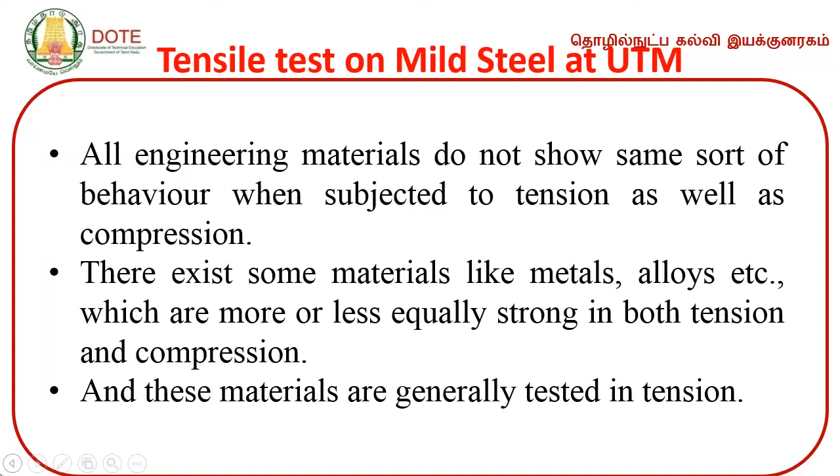These materials are generally tested for tension only, because they exhibit similar properties or similar behaviors when they are subjected to compression also.

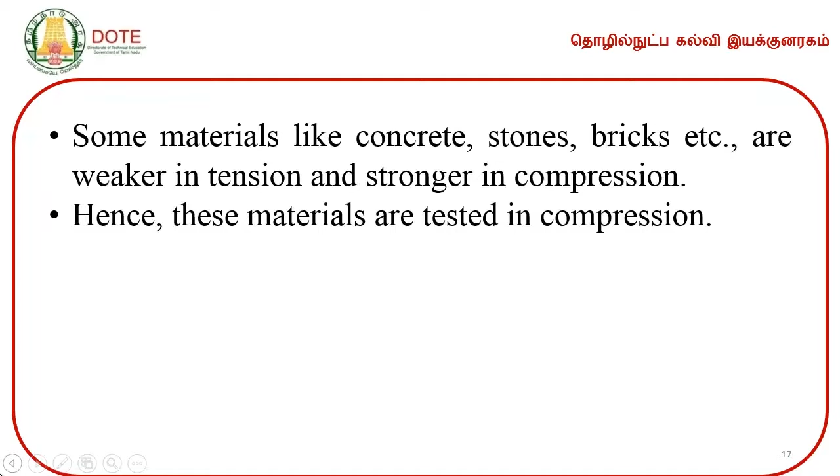Some materials like concrete, stones, and bricks are weaker in tension but stronger in compression.

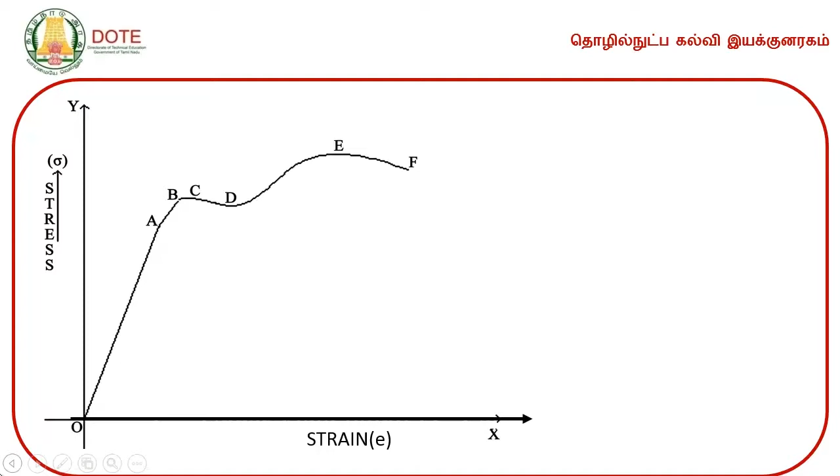It starts from O, from O to A it is like a straight line, then there is a small curve from A to B, then there is a bending from B to C, then once again there is a step down curve from C to D, then from D to E another curve, then E to F. We will see them one by one.

First, what is point A? Point A on the stress strain curve is a point up to which the plot is a straight line.

Here the stress is directly proportional to the strain. So up to point A, stress is directly proportional to strain. Up to this proportional limit, the material remains elastic and strictly follows Hooke's law.

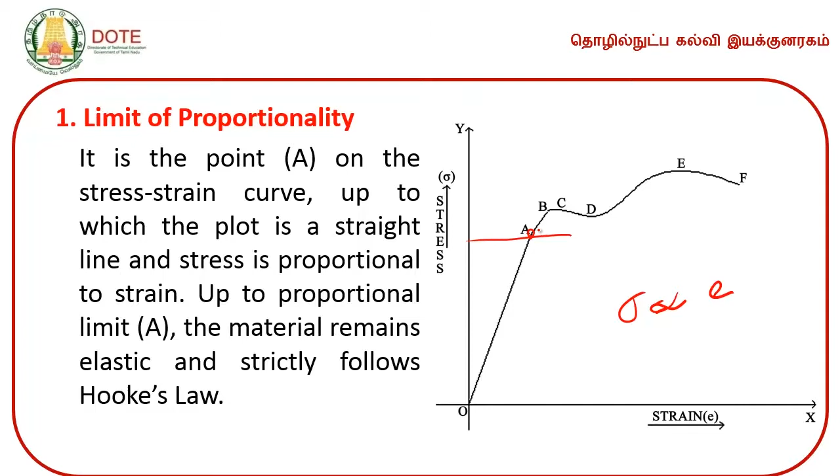It remains elastic. This is the elastic stage up to which the material remains in the elastic stage and obeys Hooke's law. Then point B, what about B?

It is the point just beyond the proportional limit. From the proportional limit to the elastic limit, the material remains elastic but does not follow Hooke's law, and so stress and strain are not proportional.

Up to A, stress is directly proportional to strain and it obeys Hooke's law.

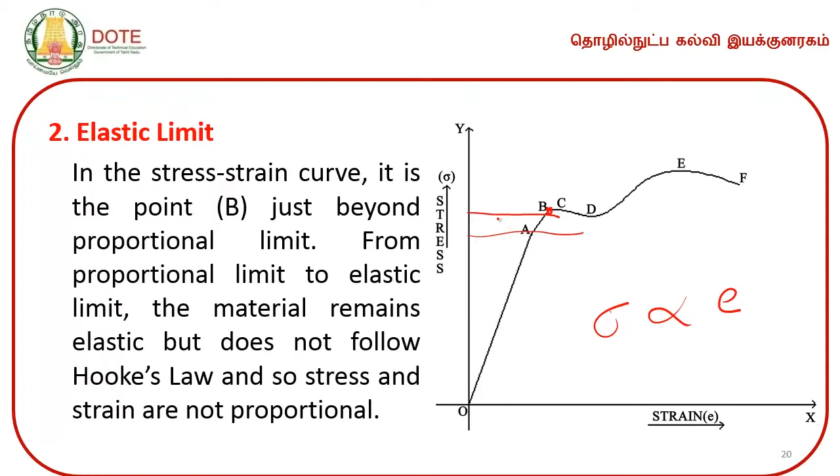But from A to B there is some variation, it is like a curve. In this curve, the material remains elastic up to this point, but it does not follow Hooke's law in this portion.

Then comes point C. Point C represents the upper yield point and point D represents the lower yield point.

The stress at which there is a sudden increase in strain without any appreciable increase in stress is known as yielding. Yielding means the strain value increases without that much increase in the stress value.

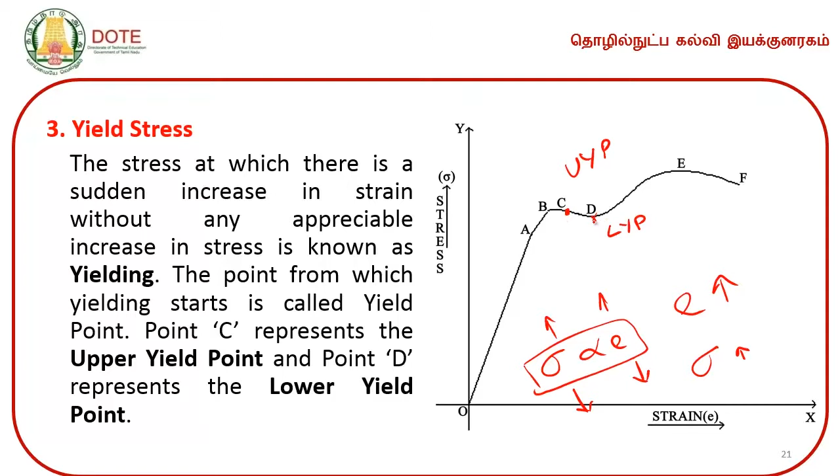In the chart, C represents the upper yield point and D represents the lower yield point. Then comes point E. What is point E? After yielding, the material attains the maximum load at E, beyond which the load falls with elongation increasing at a rapid rate. The stress corresponding to point E is known as ultimate stress.

As the load falls from its maximum value, a sudden yielding of the bar takes place over a short length, forming a neck. So we are having a rod like this. It is a ductile material. The rod is made of ductile material and it is subjected to tension.

At point E, the rod tends to form a neck. At this stage, we have already discussed what tensile force is - in an object, if there are two axial pulls, then the object is said to be under tension. Due to the applied tensile force, the length of the object will increase and the diameter of the object will decrease.

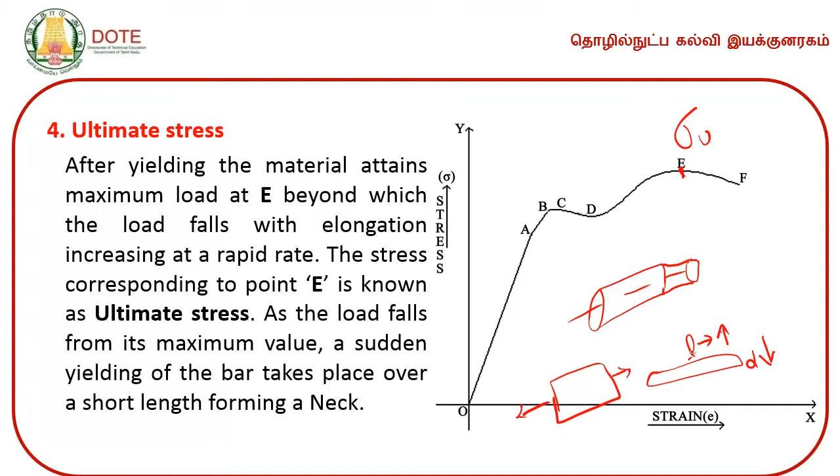Length will increase and the diameter will decrease. So there is a formation of neck in the testing rod. Then what about point F? Point F represents the breaking point.

At this stage, the elongation increases at a rapid rate and the area of cross section of the bar undergoes fast reduction. The specimen breaks at point F. So we are having a specimen - it is nothing but a rod A, B, C, D, E up to E.

It remains as it is, and from E it starts to form a neck. It starts to form a neck, and at point F it fails, and there is a drastic reduction in the diameter of the rod - in the cross section. The specimen breaks at point F.

The stress corresponding to the breaking point is known as breaking stress. The value of breaking stress will be less than the ultimate stress.

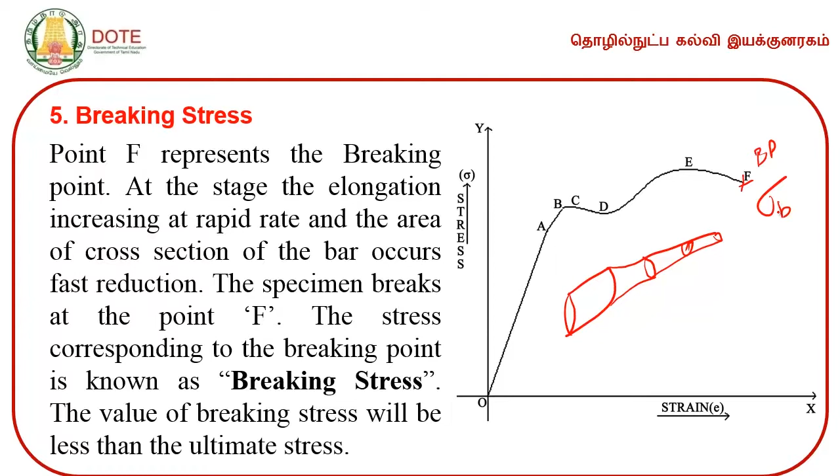Now we can determine the percentage of elongation. Percentage of elongation is given by L0 minus L divided by L. So we are having a rod of length L. This is the original length.

It is subjected to tensile force. Because of the tensile force, after reaching point E, there is a reduction in the cross section of the rod. So there is a change in the rod - an increase in the length of the rod, given by delta L.

So we can determine the original length of the rod after fracture as L0. L0 is going to be the length of the testing specimen or rod after fracture, and L is going to be the original length. From this we can determine the percentage of elongation.

Similarly, the percentage of area reduction can be determined by the formula D square minus d square, divided by D square, into 100. What is capital D? Capital D is the original diameter. Now this diameter is reduced to a smaller value, so small d is the diameter of the rod at the neck.

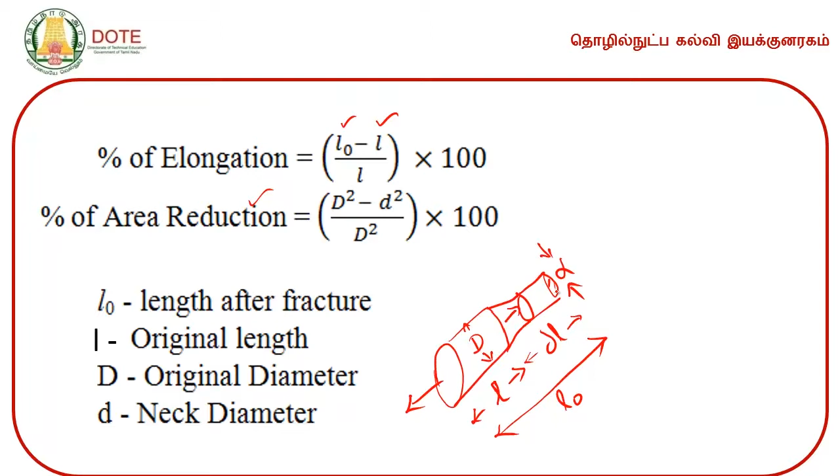So using these values, we can determine the percentage of elongation and the percentage of area reduction of the bar subjected to tensile load. Now we will look at a problem.

A specimen made of steel, having 25 mm diameter with a gauge length of 200 mm, was tested in a laboratory. So, 25 mm diameter steel rod, length is 200 mm, was tested in a laboratory.

The following data were recorded: maximum load is 140 kilonewton, load at yield point is 110 kilonewton, load at fracture is 120 kilonewton, diameter of the neck is 12.5 mm, and distance between the gauge marks after fracture is 252 mm.

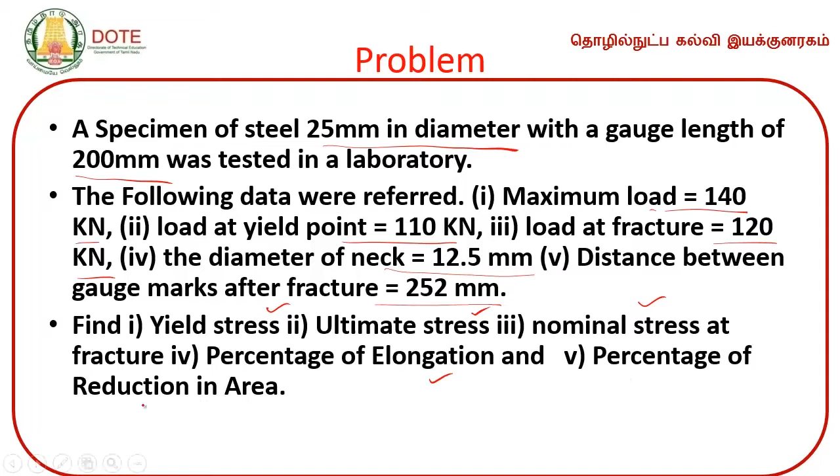Using this value, we have to find yield stress, ultimate stress, nominal stress at fracture, percentage of elongation, and percentage of reduction in area. Now we will go to the problem.

What are the given data? Original diameter D is 25 mm, original length, that is the gauge length, is 200 mm, maximum load is 140 kilonewton - this is 140,000 Newton. Load at yield point Py is given by 110 kilonewton, which can be converted into Newton. Load at fracture is 120 kilonewton, which can also be converted into Newton. Neck diameter is also given as 12.5 mm.

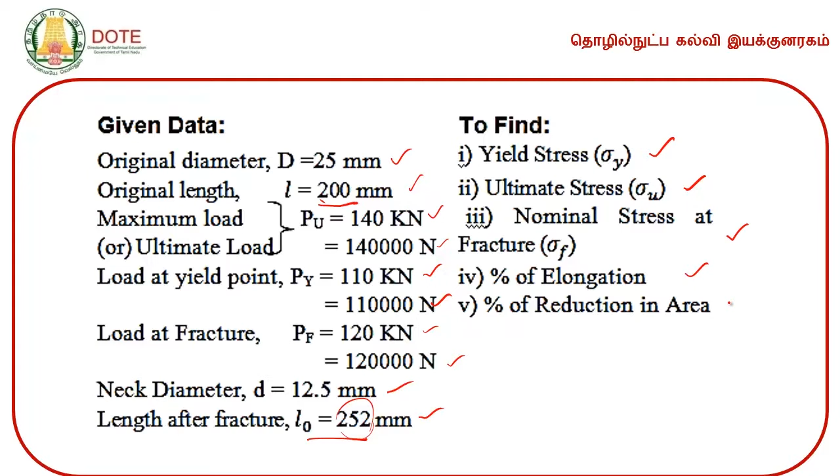Length after fracture is given as 252 mm. Since it is subjected to tension, you can see the original length is 200, now increased to 252 mm. Now we are going to find the value of yield stress, ultimate stress, nominal stress at fracture, percentage of elongation, and percentage of reduction in area. We will see them one by one.

So, what is the original area? Original area A is equal to pi by 4 d square. We know the value of d, the original diameter of the rod. What is capital D? The original diameter of the rod before the testing process. So it is going to be 490.87 mm square.

Then yield stress, what is the formula for yield stress? Yield load divided by area resisting the yield load. It is also given, so we can directly calculate it.

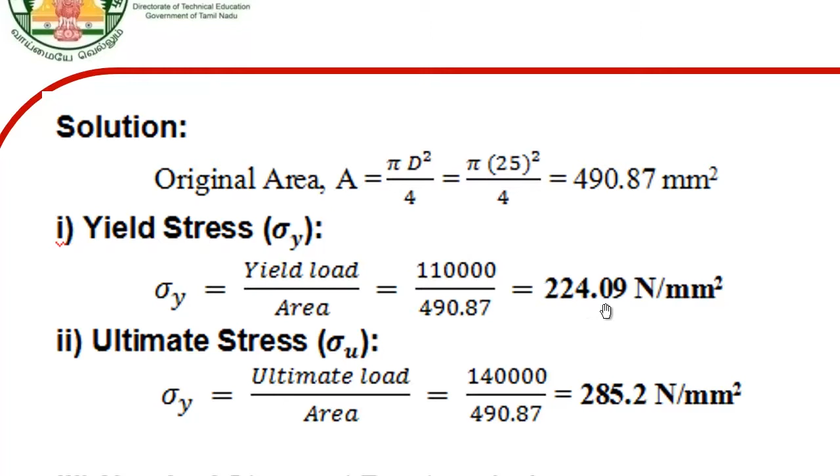224.09 Newton per mm square. Then second step, we go to find the ultimate stress. What is stress? Stress is equal to load by area. Ultimate stress is equal to ultimate load by area. It is also given, so we can calculate the value of ultimate stress.

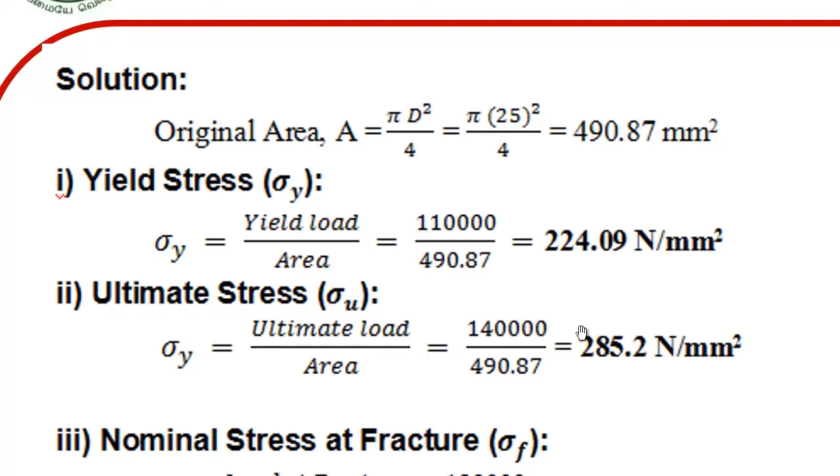Then normal stress, or nominal stress at the fracture, is given by load at the fracture divided by area. So we can substitute the values and find them easily by simple substitution, and using the calculator we can compute the value.

What is the percentage of elongation? Percentage of elongation is given by the formula LO minus L by L, where L is the length of the original object and LO is the length of the object after fracture. So, 252 minus 200 by 200 into 100%, that is going to be 26%.

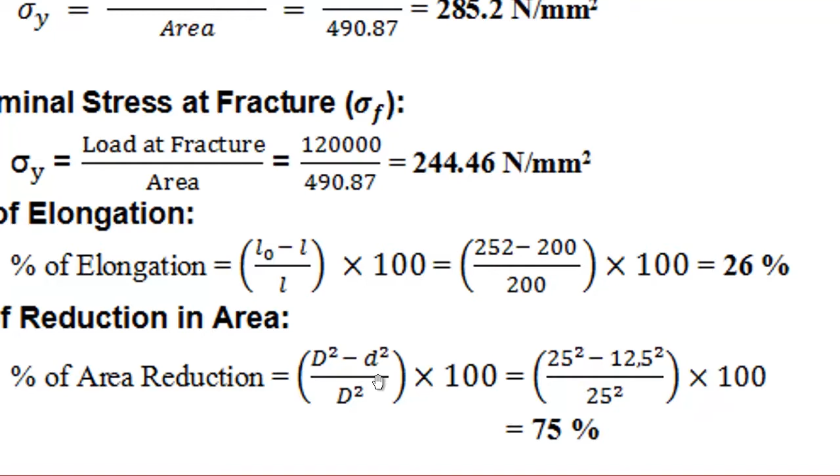Percentage of reduction in area is given by D square minus d square by D square. What is capital D? Original diameter of the rod. What is small d? The diameter of the rod reduced in the neck. The neck diameter is small d. So it is given by 25 square minus 12.5 square divided by 25 square. So it is going to be 75%.

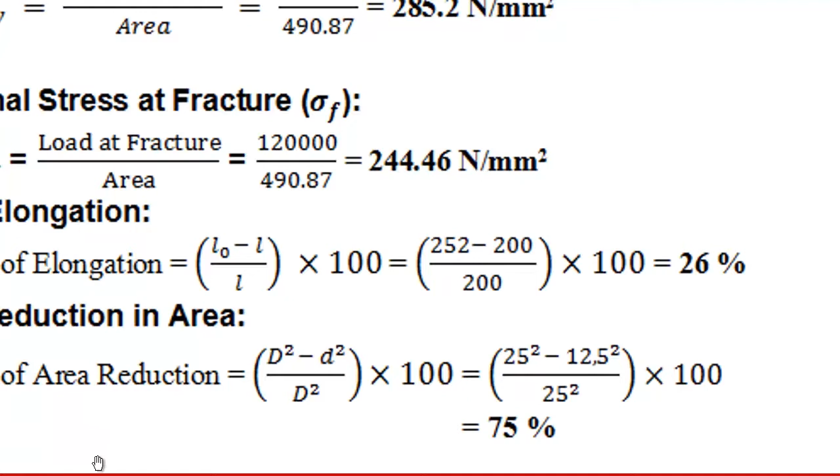Now we can summarize the results. Yield stress, ultimate stress, nominal stress, they are having the units Newton per mm square. Don't forget to put the units. Then percentage of elongation and percentage of reduction in area. Percentage of elongation in length, elongation itself means length, is 26%. Reduction in area is 75%. Is it clear? Okay.

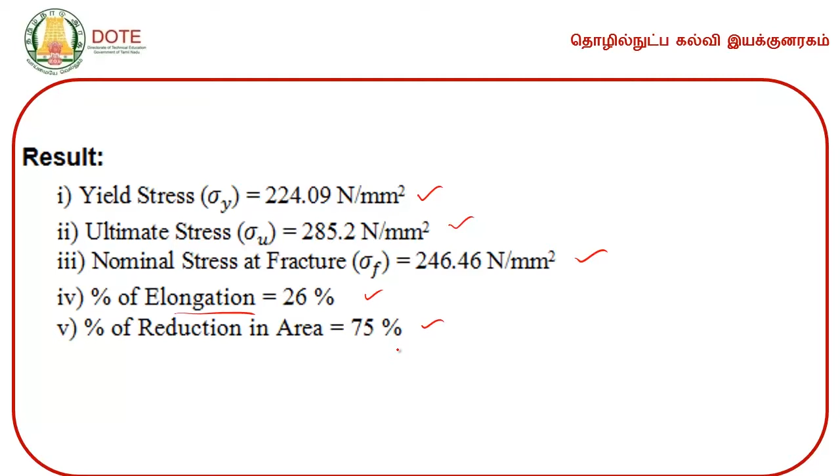Now we are going to find out the formulas used to determine the volumetric strain on rectangular and circular bars. For determining the linear strain, we use the formula change in length to original length. To determine the lateral strain, we can use change in diameter to original diameter, change in width to original width, change in thickness to original thickness, since it is going to be lateral strain.

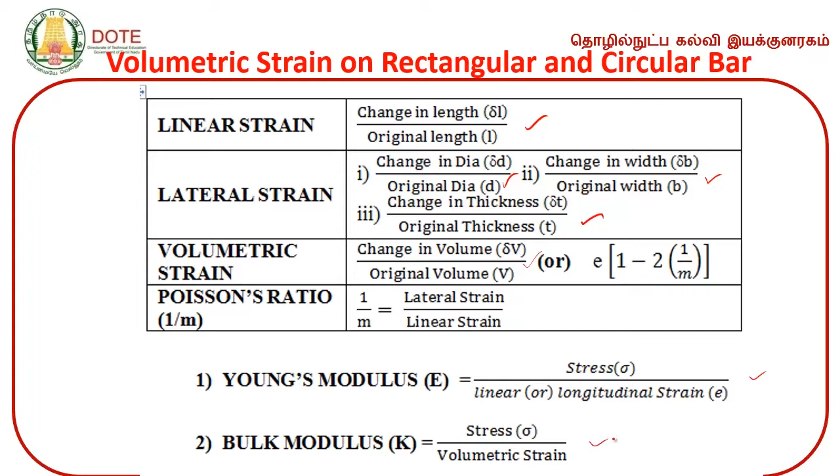Volumetric strain, what is the formula for volumetric strain? Change in volume to original volume, or it can be given by the formula E into 1 minus 2 into 1 by m. We know E and we know 1 by m. Poisson ratio is given by 1 by m equal to lateral strain to linear strain, and Young's modulus is given by stress by linear or longitudinal strain, and the bulk modulus is given by stress by volumetric strain. Using these formulas, we are going to solve the problems.

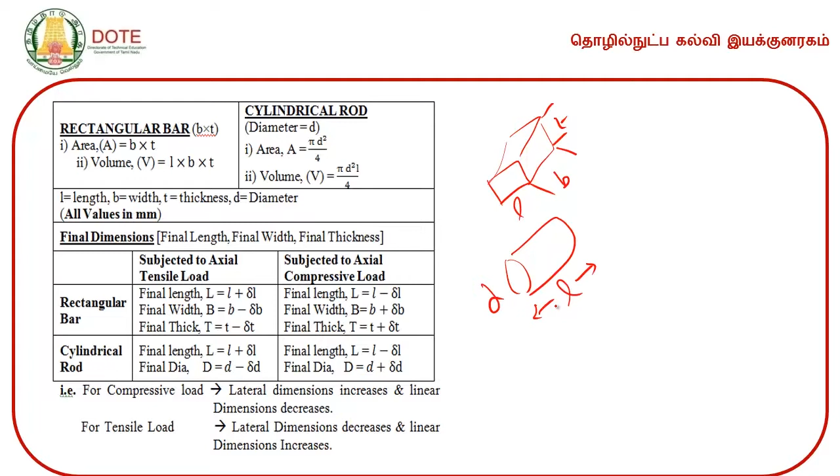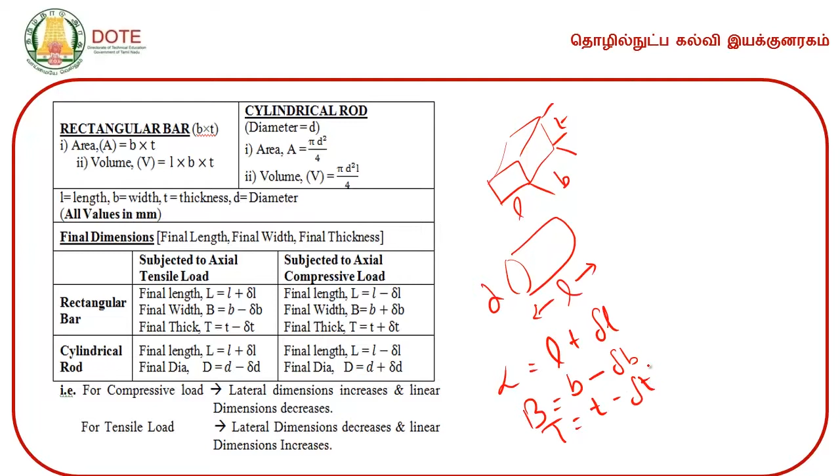All values are in mm. The final dimensions can be adjusted like this. For the rectangular bar subjected to axial tensile load, final length L is equal to original length plus change in length. Width is equal to original width minus change in width. Final thickness equals original thickness minus change in thickness, because it is subjected to tensile load. In tensile load, length will increase, other dimensions will decrease.

If you consider the compressive load, then what will happen? Length is going to reduce, other dimensions will increase. So the final length will be initial length minus change in length. Final width B is going to be initial width plus change in width. Final thickness is going to be initial thickness plus change in thickness. Imagine an object.

Now we are going to apply the compressive force. Because of the applied compressive force, length will shrink. Length will reduce, but width and thickness will increase.

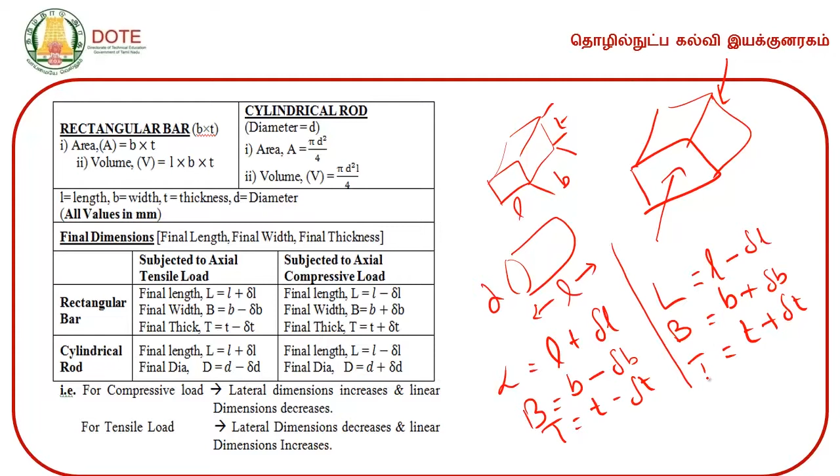But if the object is subjected to tensile force, what will happen? Length will increase, other dimensions will decrease. This is the concept.

For a cylindrical component, length is going to be initial length plus change in length. Final diameter is going to be initial diameter minus change in diameter.

But the same cylindrical rod, when subjected to compressive load, what will happen? Length is going to be L minus del L. Length is reduced, diameter is increased, d plus del d.

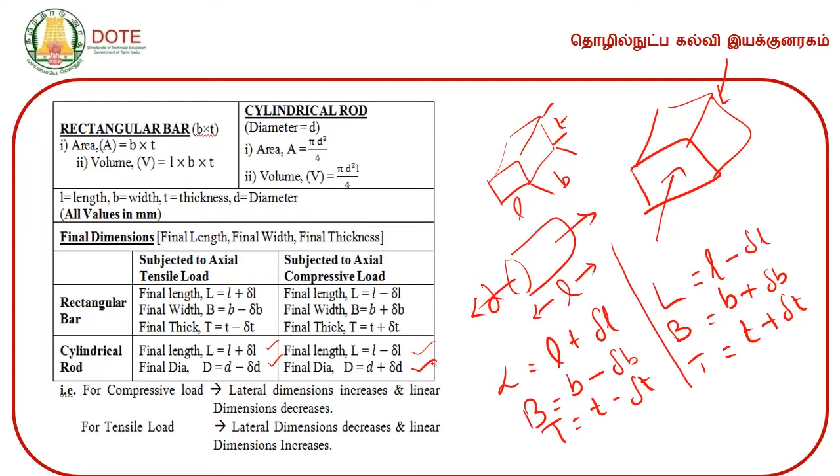Now we will try to solve a problem using the formulas we learned just now. A bar of 30 mm cross 30 mm cross 250 mm long is subjected to a pull of 90 kilonewton in the direction of its length.

The extension of the bar was found to be 0.125 mm, while the decrease in each lateral dimension is found to be 0.00375 mm. Find the Young's modulus, Poisson's ratio, modulus of rigidity and bulk modulus for the material of the bar.

So, the size of the bar is given: width and thickness, length. It is subjected to an axial pull. What is meant by pull? It is a tensile load.

90 kilonewton in the direction of its length, so it is axial load. Extension of the bar was found to be 0.125 mm. It is nothing but del L.

Increase in the length, decrease in each lateral dimension is found to be 0.00375, it is nothing but del W and del T. This is going to be del L, because of the applied load.

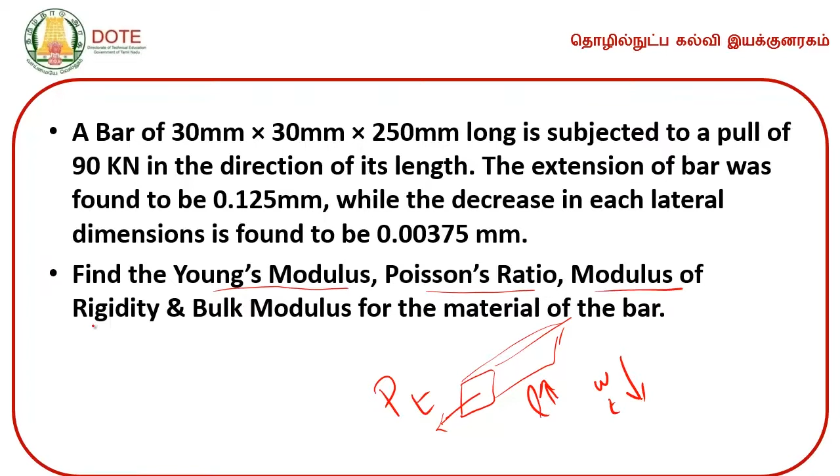What we got to find? We got to find the Young's modulus, Poisson ratio, modulus of rigidity and the bulk modulus for the material.

So, the given data: width, thickness, length, load is given in kilonewton, so we have to convert them into Newton. Change in length, change in width and thickness are used to find Young's modulus, Poisson's ratio, modulus of rigidity and bulk modulus.

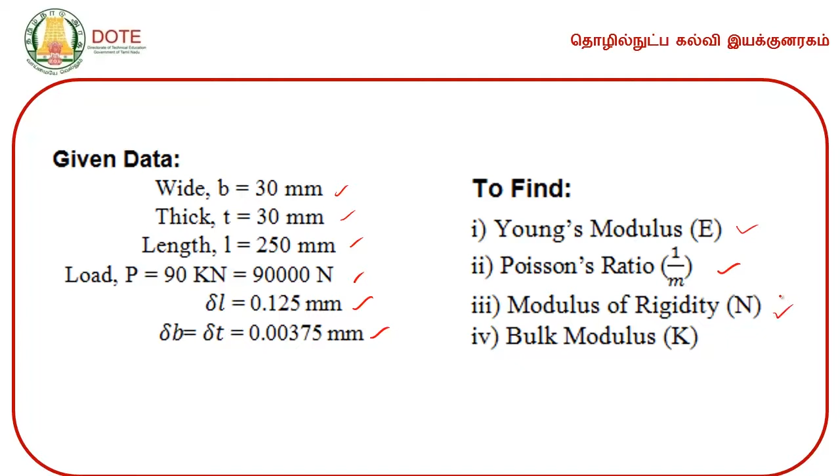Look at the problem. So, how to find the lateral strain?

Lateral strain is given by change in width to original width, or change in thickness to original thickness. So, lateral strain is given by 1.25 into 10 to the power minus 4, simply by direct substitution of values, that is all.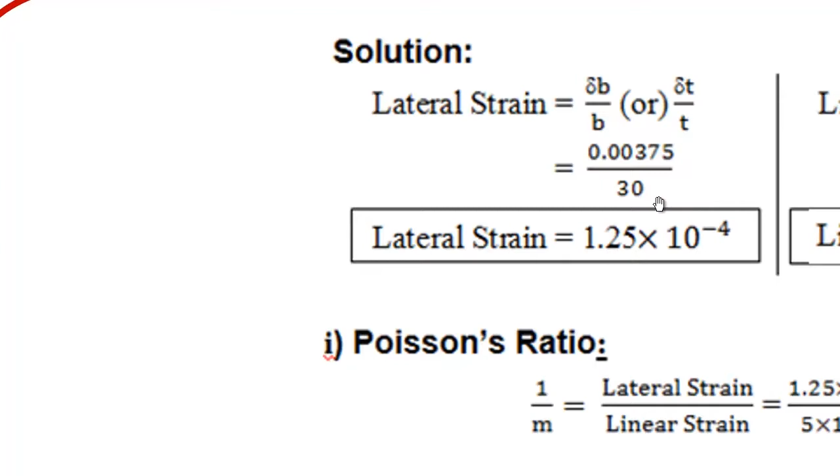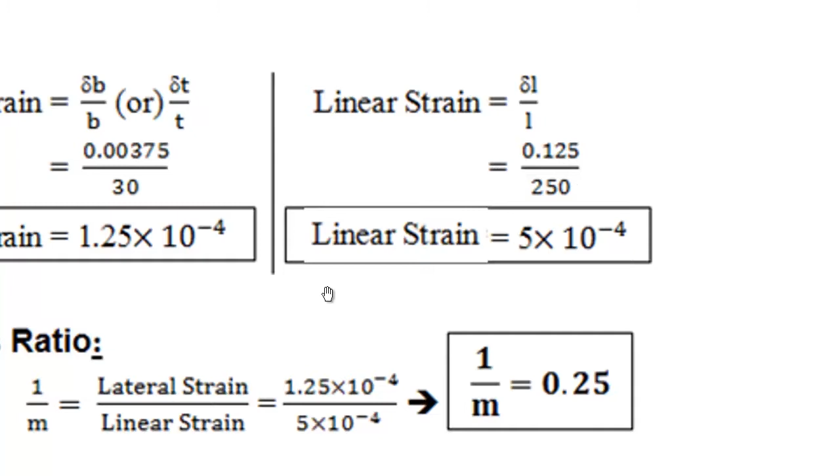What is linear strain? Linear strain is given by del L by L. Here also we directly substitute the values, and the linear strain is going to be 5 into 10 to the power minus 4.

Then we are going to determine the Poisson's ratio. What is Poisson ratio? Poisson ratio 1 by m is given by the formula lateral strain by linear strain.

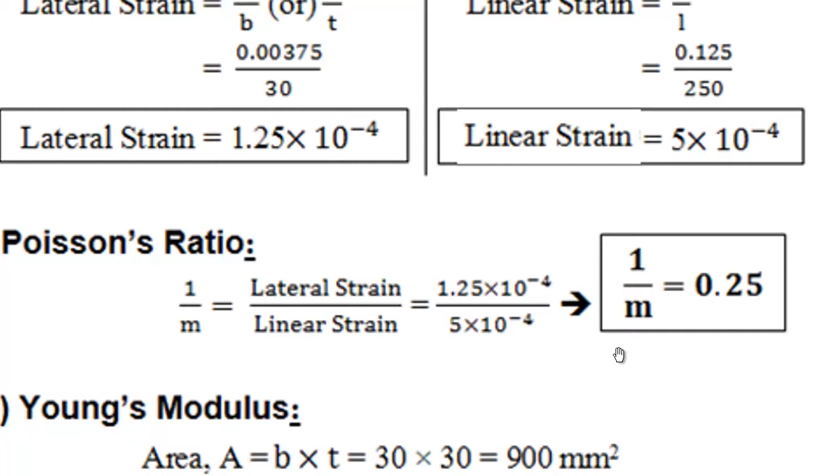Both are given. We just now calculated the values, substitute these values for lateral strain and linear strain. We will get the value of Poisson's ratio, 1 by m equal to 0.25. Since it is a ratio, it has no unit.

Then Young's modulus. To determine Young's modulus, we need the area. Area is going to be B into T. It is going to be 30 into 30, 900 mm square.

Young's modulus E is given by PL by A into del L. E is equal to PL by A into del L. We know the value of P, the load.

We know the original length L. We know the area A, just now calculated as 900 mm square, and the change in length is given by 0.125 mm. We can easily calculate the value of Young's modulus using a calculator.

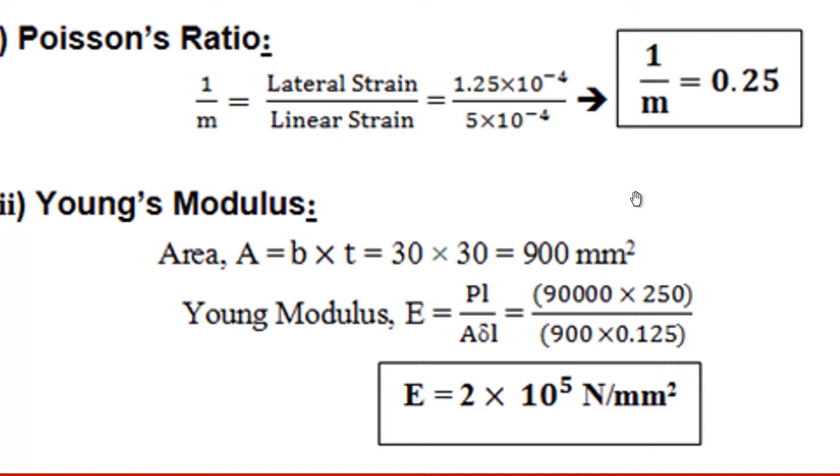E is equal to 2 into 10 to the power 5 Newton per mm square, approximately 2 into 10 to the power 5 Newton per mm square.

Then we are going to find the value of modulus of rigidity. How to find the value of modulus of rigidity? Modulus of rigidity n is given by a relationship between Poisson ratio and Young's modulus.

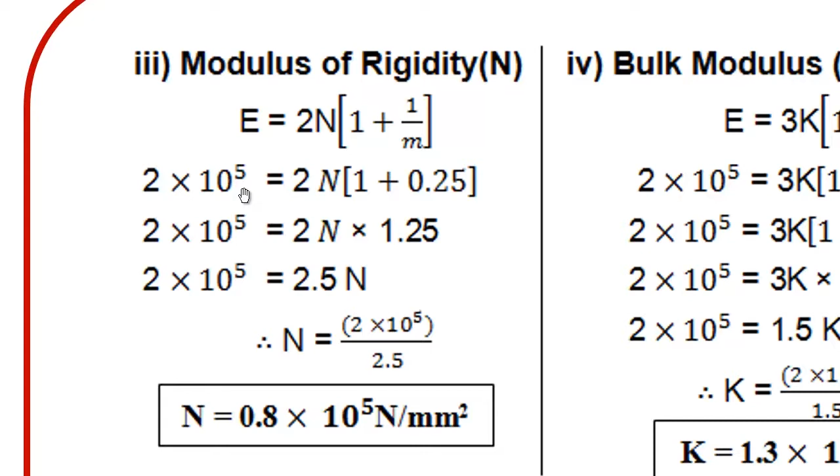Young's modulus E is equal to 2 into n into 1 plus 1 by m, where 1 by m is the Poisson ratio and E is the Young's modulus. 1 by m just now calculated as 0.25, E is 2 into 10 to the power 5, it is given. So, we can calculate the value of n as 0.8 into 10 to the power 5 Newton per mm square. Similarly, we can calculate the value for bulk modulus.

How to calculate the value for bulk modulus? Bulk modulus K is given by a relationship between the constants as Young's modulus E is equal to 3 into K into 1 minus 2 into 1 by m, where 1 by m is the Poisson ratio.

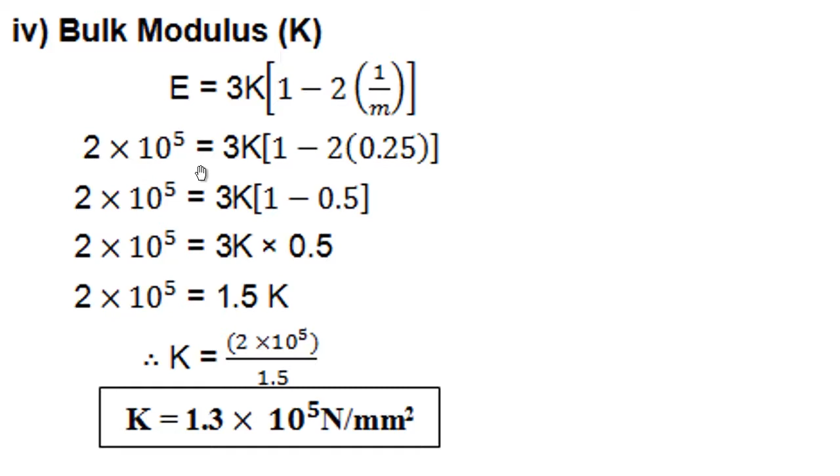Just now we have calculated, it is nothing but 0.25. By substituting the value of Young's modulus as 2 into 10 to the power 5, we can calculate the value of K as 1.3 into 10 to the power 5 Newton per mm square.

So we can summarize the results as Young's modulus E is equal to 2 into 10 to the power 5 Newton per mm square, Poisson ratio 1 by m is equal to 0.25, modulus of rigidity is 0.8 into 10 to the power 5 Newton per mm square, bulk modulus K is equal to 1.3 into 10 to the power 5 Newton per mm square.

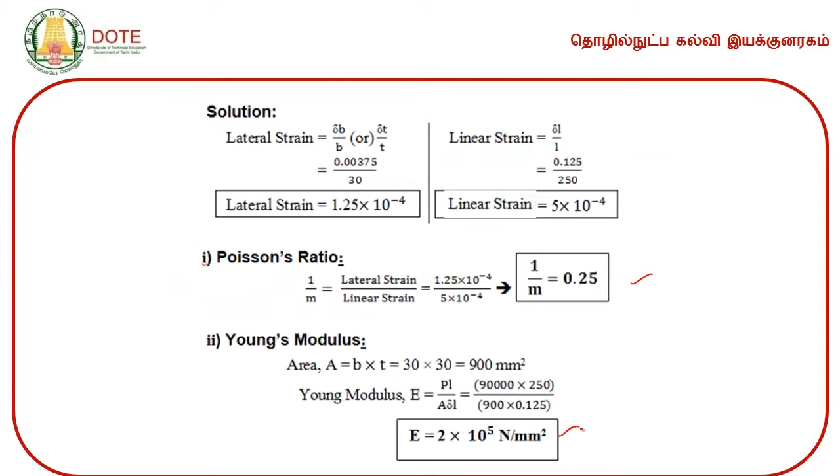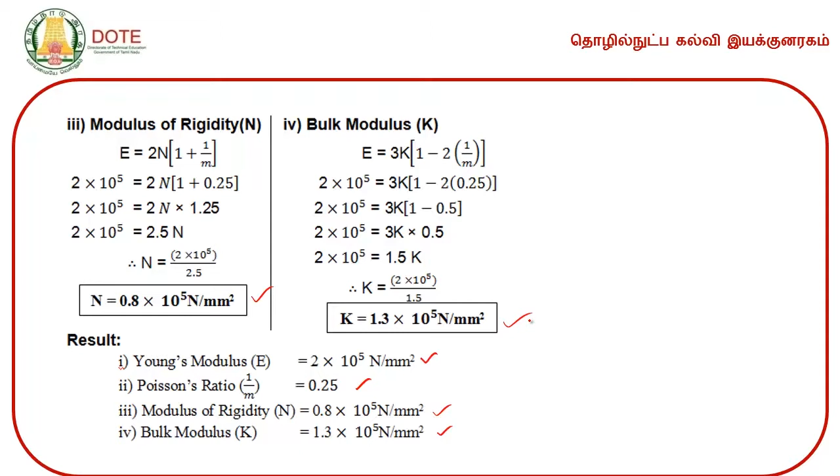Okay, we have calculated Poisson ratio, Young's modulus, then modulus of rigidity and the bulk modulus. So with this we are coming to the end of the problem. Now we have to summarize this one.

In composite material, strain is equal for both the materials. We have already discussed this one in the previous sessions. In the composite material, all the materials behave as same in strain. So the strain is equal for all the materials.

So we can compare strain of first material with strain of second material. What is strain? Strain is given by the formula stress by Young's modulus.

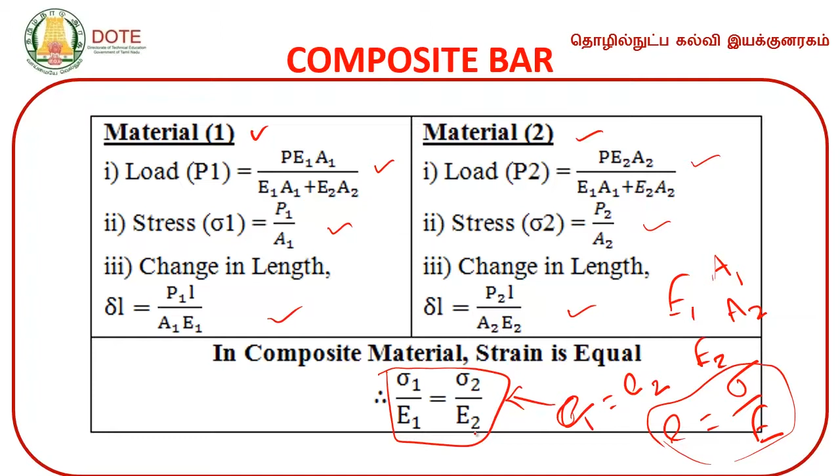We can find out what is required. What are the unknown values?

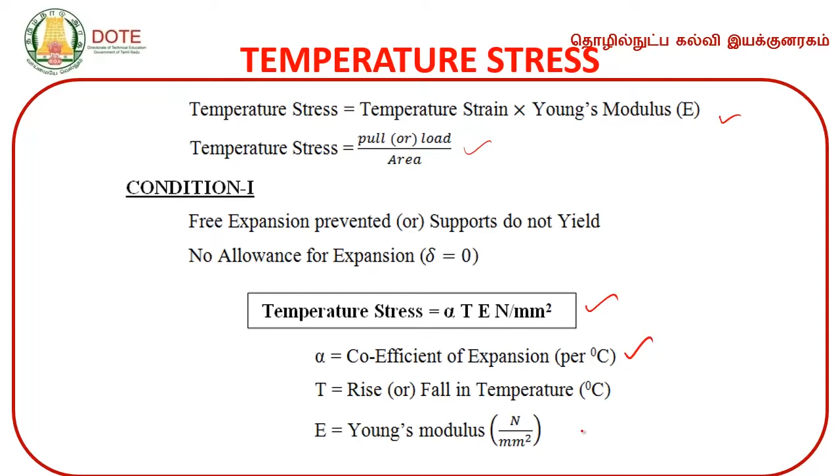It is given by the formula alpha into T into E, where alpha is the coefficient of expansion, T is the rise or fall in temperature, and E is the Young's modulus.

Condition 2, supports yield. Allowances for expansion as del is equal to x mm. So it is given by the formula temperature stress is equal to alpha T l minus del by l into E, where del is the allowance of x mm. The unit is going to be Newton per mm square.

Condition 3, supports yield, or allowance of expansion is given as in terms of percentage. Here the temperature stress is given by 100 minus x by 100 into alpha T E Newton per mm square.

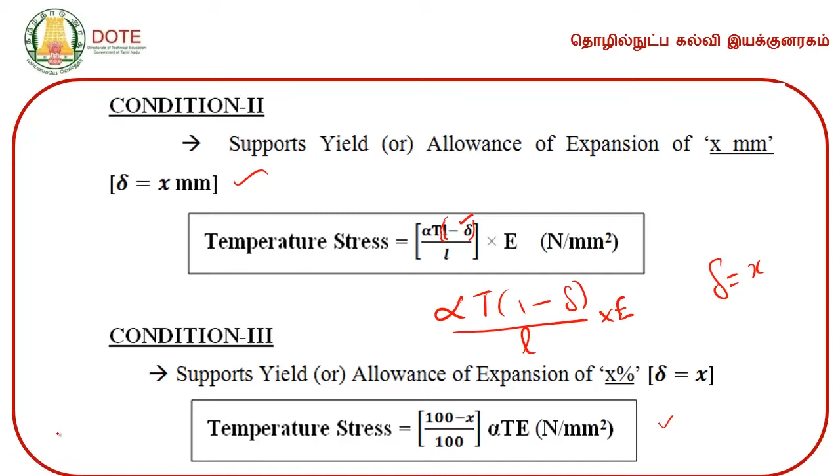So with this we are coming to the end of this session. In this session we solved some problems and we have learned how to find out the values for temperature stresses and how to solve the problems related to composite bar. Okay. Thank you. We will meet in the next session. Thank you.